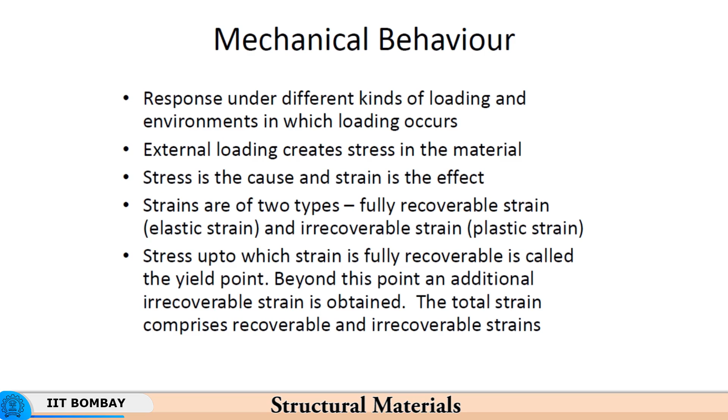So you have what is called rotating bending type of fatigue loading coming into play, because if you look at the shaft, it is being bent as well as rotated. So you have a shaft which is rotated at a certain RPM and it also deflects under load, and this deflection results in tensile compressive variation in the strain. Why?

Let us see. Now, let us say this is only bending, right. So at the outer fiber at the top you have a loading resulting in tension, at the lower fiber you have compression. Now imagine this being rotated at a higher speed.

So, at some point this lower fiber will go to the top and the top fiber will come to the bottom, and since the direction of application of force remains the same, what was under compression earlier now is under tension, and what was under tension comes under compression. This happens with the frequency at which the shaft is rotating. So, if the rotation of a shaft is at 5000 RPM, then this change will happen 5000 times.

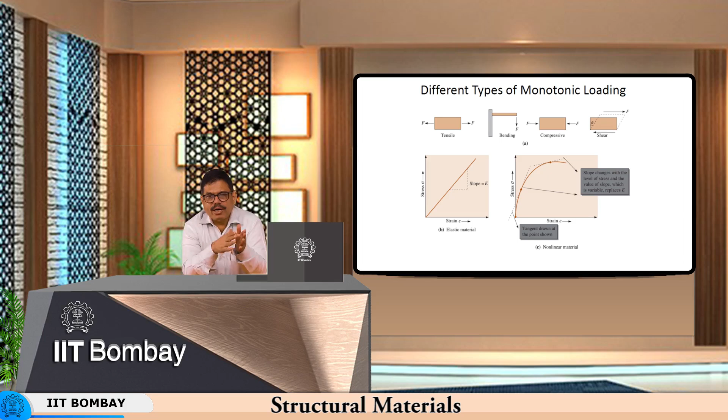You will experience these tension to compression changes taking place 5000 times in a single minute. The frequency at which the loading changes direction is typical of certain kinds of equipment, certain kinds of shafts especially. So, from the boiler where you had a load for a long duration, now you have a shaft which has got loading alternating between tension and compression. This is called rotating bending type of loading.

Similarly, there are different kinds of equipment which would be subjected to loads, let us say shear load or compressive load. There are machine elements which would be subjected to this shear compressive type of loads, and we expect deformation to be purely elastic in nature.

So, when the material is in service, you want the deformation to be purely elastic, and therefore the elastic stress strain ratio becomes important. The higher is the value of the slope, that is E, Young's modulus, the lower is the deflection or lower is the strain. That is because even if the stress rises to a very high value, a high slope in E ensures that the strain is very small.

This becomes important because if you have equipment of, let us say, infinite stiffness, meaning infinite Young's modulus, then it will not deflect at all, which means the machine elements will not change their shape at all. Now, although these strains are recoverable, so if the load is removed the strain is completely recoverable, the fact that the material is changing shape under load can itself create a problem over a period of time, and this is due to what is called fatigue.

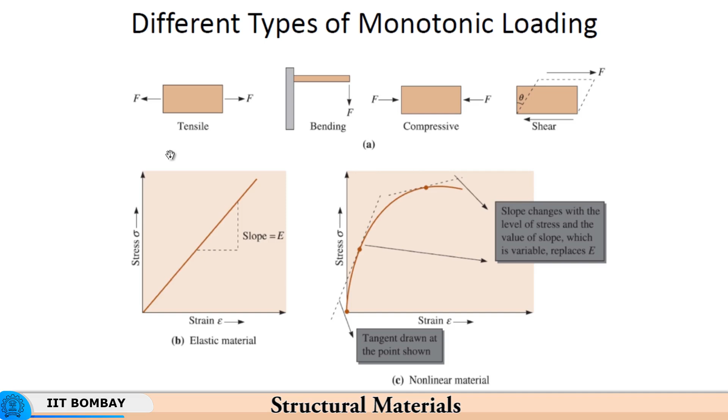Now we have a repertoire of materials, lots of materials which are possible, and we have seen that if we give a stimulus - that is, you increase the pressure or force to its working condition in service, sustain it for a certain period of time, and then take off the force that was applied - it will result in a stress which will rise to its in-service condition level, get sustained over a period of time, and then the stress will fall to 0 as the load is removed.

So load is the external stimulus and stress is the response of the material, internally generated to sustain that load - basically to achieve equilibrium between the externally applied load and the material. So the material reacts in the form of stress, which is in response to the load being applied, and this load is sustained for a period of time and then brought to 0.

Now the difference between stress and pressure, although the units are the same, is that pressure acts on exterior surfaces, while stress acts internally - it is generated internally. On the free surface, therefore, stress is 0. On the interior parts or interior surfaces, you can have stress generated in response to the load or pressure conditions acting on the surface.

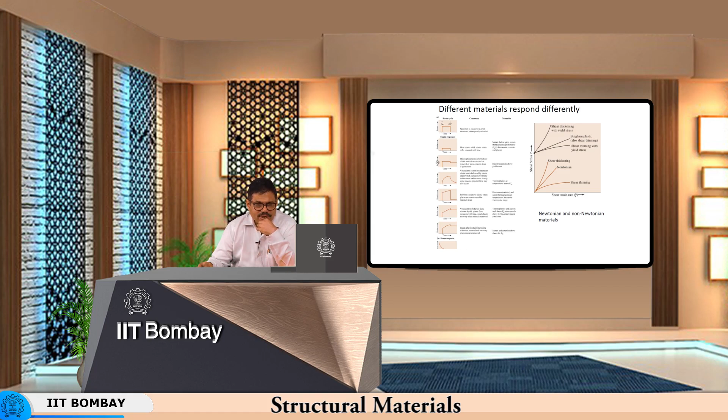Then there is an increase in the strain even under constant stress. So even if the stress remains constant, the strain continues to increase. This is the difference between this and that, and then you have immediate drop in the strain as your load is removed or the stress is removed, but then there is a retention of some amount of strain, which is the plastic strain, which is non-recoverable, or which is also called plastic strain.

So elastomers, rubbers, and some thermoplastics at temperatures above the viscoelastic range result in this kind of behavior. This way one can go on understanding the behavior of different materials. You also have another material like thermoplastics and glasses well above the glass transition, and metals above 0.5 Tm under special conditions.

Here you have what is called an immediate increase in the strain rate, and then you have hardening of the material due to the strain rate. So here you have hardening due to the strain rate increasing due to viscous effects.

Now here you are not talking about viscoelasticity. The difference between this and this is that here it is viscoelastic in nature, here it is viscoplastic in nature. So there is a significant amount of plastic strain that is retained over here. So you have thermoplastics and glasses above the Tg, and so they become a kind of viscoplastic.

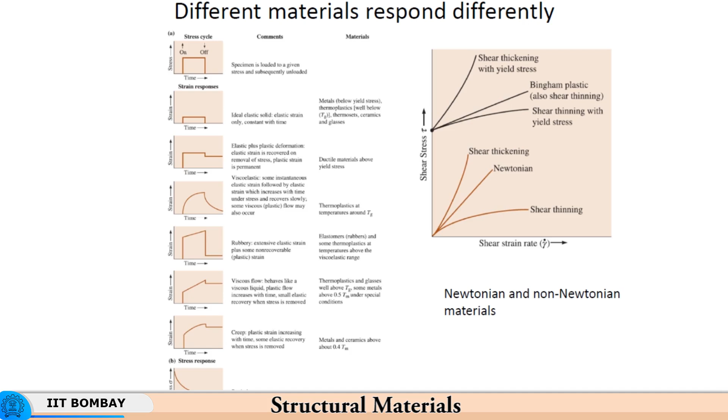So supposing you have loaded a sample - the stress level, as in thermoplastics, you load them up to a particular strain level and leave it at that - the stress level will continuously decrease due to relaxation of these polymer chains. So basically these are the different responses of the material, and that is exploited in actual use for different applications. That is what I wanted to emphasize by this.

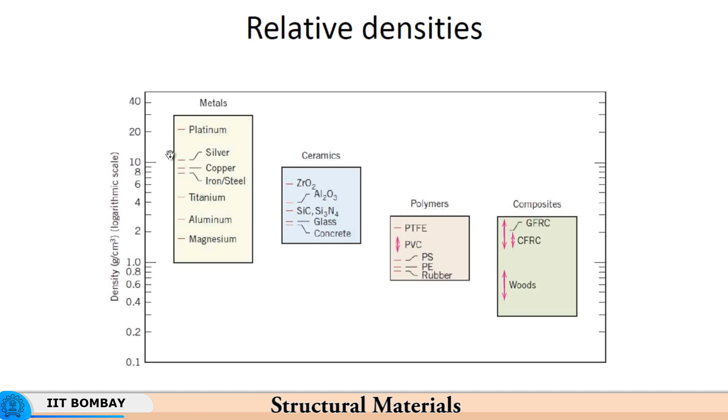The relative densities determine the weight. So we want to determine the strength to weight ratio, and so these composites, for example, have the least amount of density and therefore least amount of weight for a given volume. So if you can have very high strength with composites, then the strength to weight ratio would be of great advantage, typically in aerospace structures.

So we have discussed this already, and then I will come to the issue of the yield point, which we had discussed earlier. So I will just come to a worksheet where I will show you how it is determined again, so that you have no questions on that.

Under elastic conditions, the true stress and engineering stress are the same, because true strain is practically equal to the engineering strain. There is no change in the cross section, and therefore the true strain and engineering strain are practically the same. That variation can be in the 7th or 8th decimal place, which is not of interest to us.

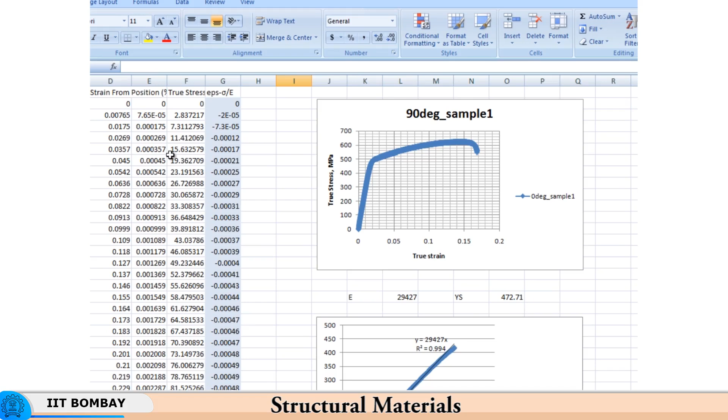Now this is the parameter which I have plotted for the stress strain curve. In the elastic range you have epsilon minus sigma by E, and this keeps on increasing. Here is the third decimal, and you see it has reached 0.00199, so 0.002 and less than 0.002, here slightly more than 0.002. So I interpolate between these two values, and then I have my yield strength as 472.71.

From this point onward I start applying my plastic deformation formulae. So I plot ln sigma versus ln epsilon, because I want to fit the plastic deformation curve into a constitutive equation sigma equal to k epsilon to the power n. This is the kind of Hollomon equation. k is the strength coefficient, n is the strain hardening exponent. So k epsilon to the power n is my formula in which I try to fit it, giving ln sigma equal to ln k plus n ln epsilon, that is the equation I get.

I then use this to calculate the value of n and k. I have r square always beyond 0.99, say 0.995 or 0.998, which is good, and I get the value of n as 0.128 and k as 805.127.

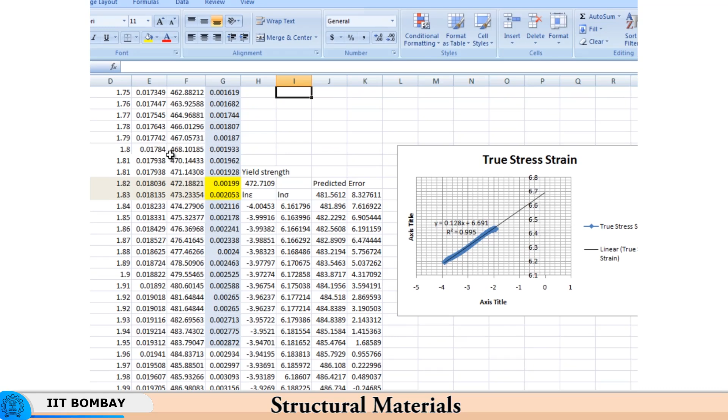If you look at the stress, it is about 473 MPa, and the maximum error is about 8 MPa. So 8 in 473 is a very small error which is tolerable, but if you want to really use the equation sigma equal to k epsilon to the power n, it is appropriate to go beyond about 8% of true strain. So if the strain is beyond 8%, the error continues to decrease to a very small level, and if you go down further it will be a fraction of a percent.

You have about 3 MPa error in over 500 MPa, 526 MPa of stress, so it is hardly any error that is incurred. That is why this equation becomes accurate not at very low plastic strains, but at relatively higher plastic strains, meaning here the plastic strain is comparable with the elastic strain in magnitude. 0.2% was the elastic strain.

We have assumed up to 0.2% proof stress for the plastic strain. Here you see it is a very small plastic strain, and the plastic strains are comparable with the elastic strains we had taken, like 0.002, 0.003. So the plastic strain is comparable with the elastic strain. We had put our yield point at 0.002, this is 0.003.

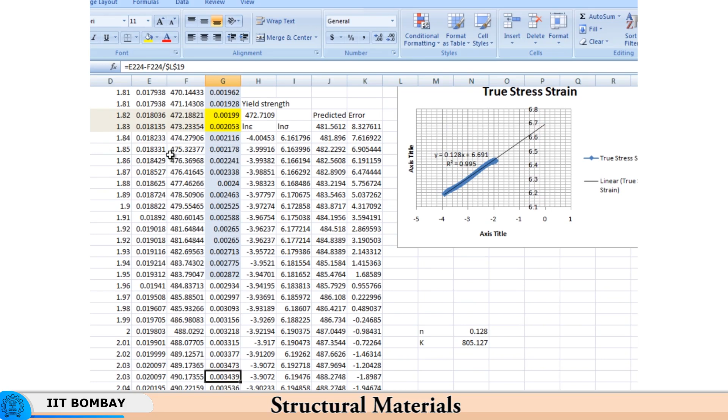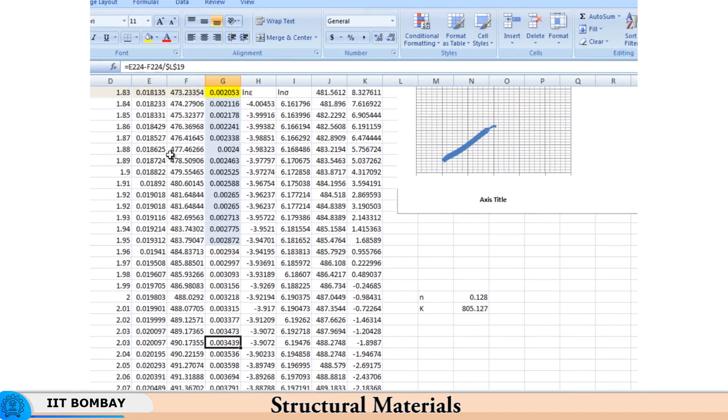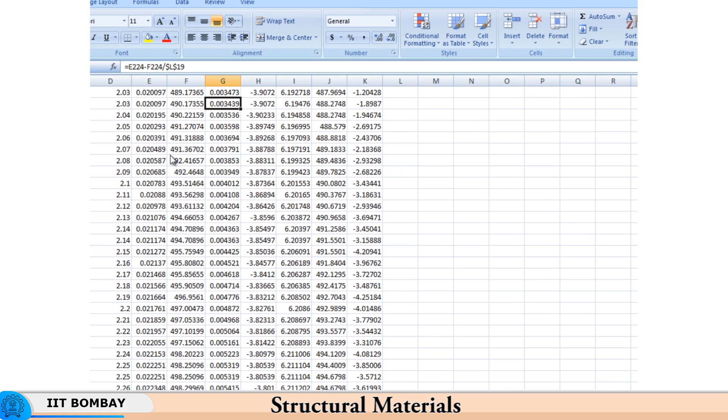So this region is kind of elastoplastic in nature, whereas as you go down you can apply the equation sigma equal to k epsilon to the power n with reasonable degree of accuracy. So this is what I wanted to explain about the yield point, and now we come back to our discussion about the mechanical properties.

You have the yield points of different materials given here, and if you load and unload, you see what is shown here. If you load and unload, you again have to get the 0.2% proof stress. This is the elastic recovery. So if you take a sample, load it to a certain strain, unload it, and then reload it, it will again follow this curve, and it will yield here and continue further. If you join this, it will follow the same curve, except for this cusp which results from loading and unloading.

This is the ideal situation. In reality, you have unloading from some strain, and then reloading taking place, so there can be slight variation, especially if you have unloaded it to a region of compressive strain, then the yield point comes down. So if you have unloaded the material to a strain below 0, meaning in the other direction, the material will yield at a lower yield point compared to what it did during tension. Then when you load it again, it will yield below the yield point at which it yielded under compression. So the material will undergo softening as you change the direction of stress.

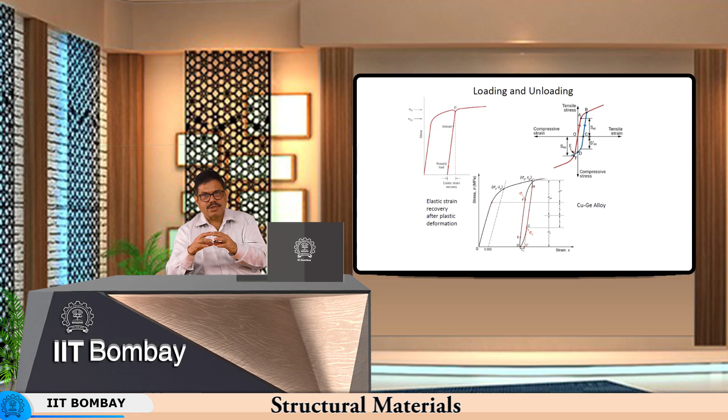Why? Because now the surface will get progressively softer, because the direction of stress is changing and the yield point has been exceeded. Initially the yield point was exceeded in tension, so in compression it yielded at a much lower yield point. Again, when subjected to tension, the yield point was further below. This way the shaft becomes softer and softer at the surface, and cracks develop at the surface and start moving inwards. This is how damage gets accumulated, particularly when the stress goes beyond the yield strength of the material, so the accumulation of damage is very severe when you cross the yield point.

Now, in some alloys like copper germanium alloy, what happens is when you unload a material, you see that the recovery, the strain recovery, is much higher than what would have happened if the stresses were purely elastic. So it is not just the elastic strains which have been recovered, but there is some additional recovery, and so you have this closed loop. The area of this loop signifies the energy dissipated inside the material.

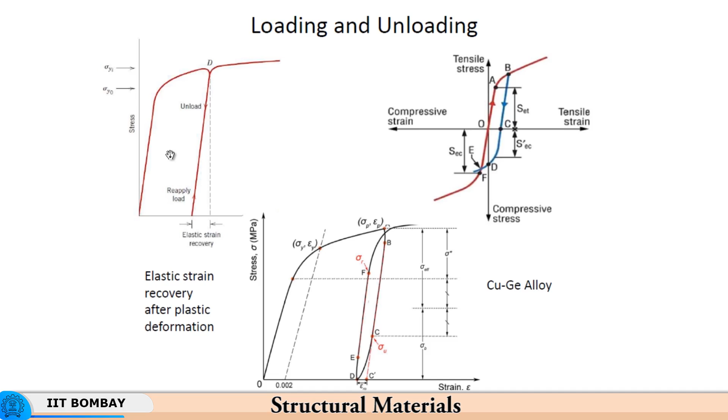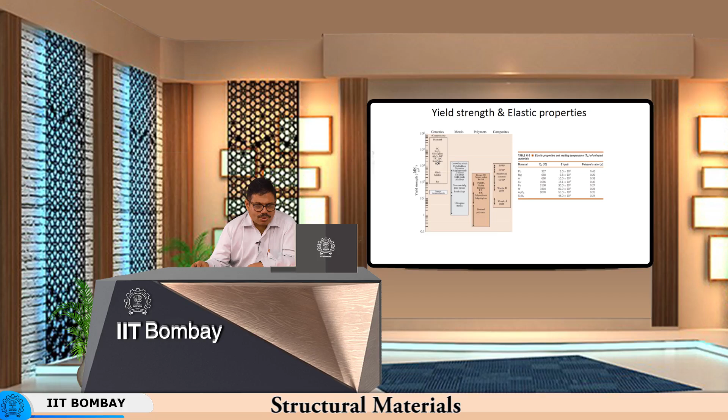You have polymers which have got completely different behavior with respect to loading compared to metals. You have metals in a wide range of yield strengths depending on how much you can alloy them, and therefore you can tailor the metals to different strength ranges, starting with 0, 10 to the power 0, up to 10 to the power 3, or something more than 10 to the power 3 MPa in yield strength.

So here you see that temperature affects the elastic properties. You have tungsten, which has got a very high modulus of elasticity, and it is retained at high temperatures, and that is the reason it is used for high temperature applications. It is called a refractory alloy, whereas steel and aluminum are not so good in resisting temperature when it comes to Young's modulus. Aluminum has got a low Young's modulus which diminishes very rapidly with temperature. So this is a good material for hot working or high temperature deformation, whereas tungsten is a good material for high temperature structural applications.

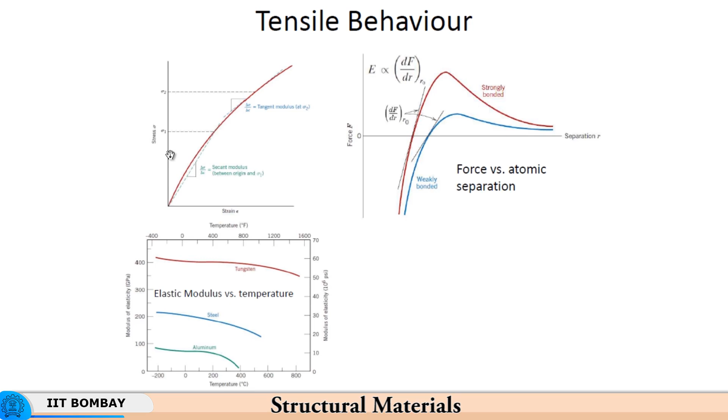Now we solve a small problem: calculate the elastic elongation. You have delta L by L naught, corresponding to the strain, on a 305 mm copper piece which is pulled within the elastic regime under a stress of 276 MPa. So your Young's modulus is given, and sigma divided by Young's modulus is the elastic strain. So delta L by L naught is the value of elastic strain, and delta L is obtained by multiplying this by L naught, which is 305 millimeters, and therefore the elastic elongation is 0.77 millimeters.

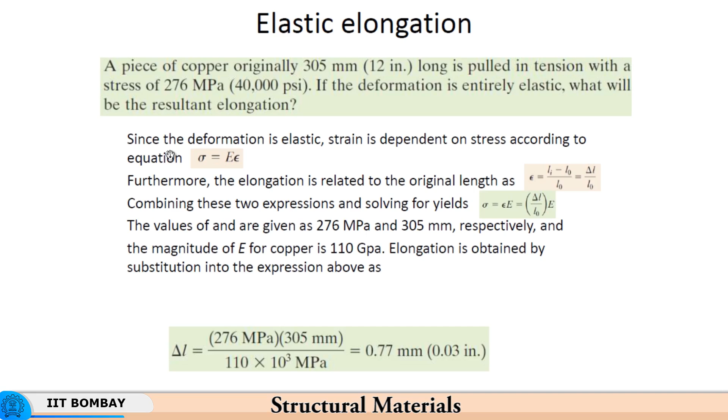So we have seen the energy absorbed by the material during the course of forming. We say that you have elastic and plastic regimes of deformation. If your deformation is in the elastic regime, let us say up to the yield strength itself, then you would have so much energy stored under elastic deformation. So UR, the energy stored in the material in elastic condition, is equal to the integral of sigma d epsilon. Mind you, this is the recoverable elastic energy, because once you remove the load, the stress becomes 0, the strain becomes 0, and therefore the entire energy is recovered.

So under load you have a certain amount of strain energy in the material, under no load the energy is exactly 0. That is why this is a nice right angle triangle, and therefore the integral of sigma d epsilon is essentially 1/2 of sigma y into epsilon y, the area of this triangle, which gives you the energy stored under elastic conditions, sigma y square upon 2E. So if the Young's modulus is practically 0, then you have a very large amount of elastic energy stored in the material, given a constant sigma y.

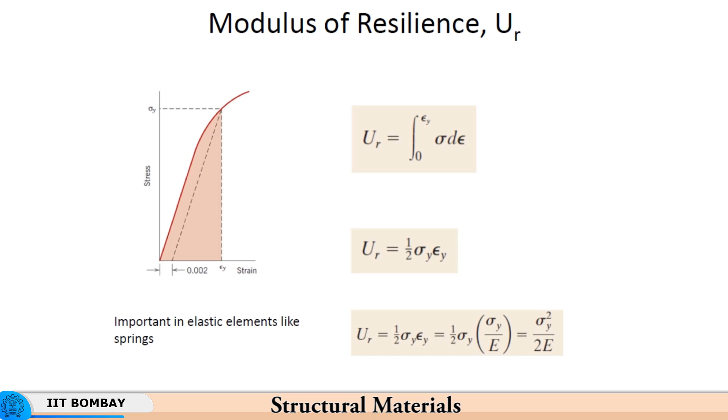Similarly, when you go to a clothing shop, the clothes are hung with the help of clips. These clips are essentially elastic in nature, in the sense that you press them, they open up, and when you release them they exert a certain amount of pressure on the cloth so that it does not fall down. So there a certain amount of elastic energy has to be stored, and normally spring steels, so-called spring steels, are made with the addition of some silicon which promotes this kind of springiness in the material. Silicon steels are well known for spring type of applications.

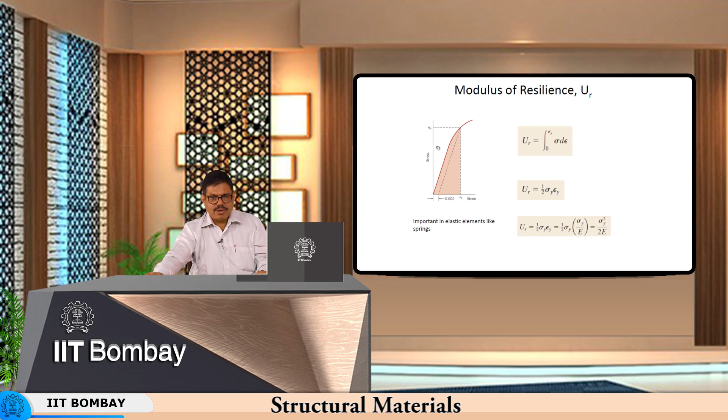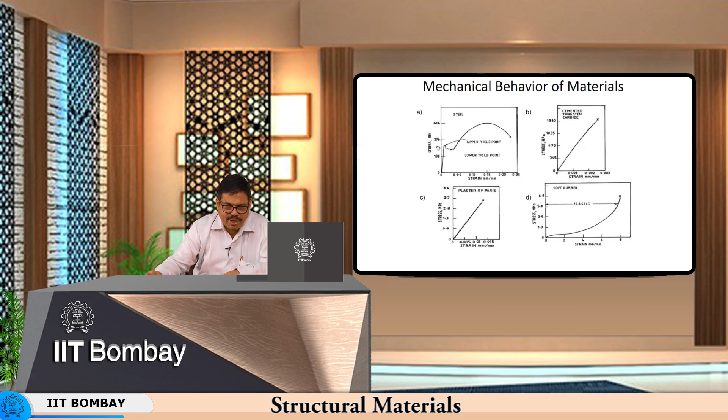So you see here different mechanical behavior which we have already discussed. You have the typical curve of mild steel here, you have tungsten carbide, and plaster of Paris. These last two are brittle in nature, and then here you have elastic deformation of a large extent due to uncoiling of polymer chains. We have seen all these things before, and the indices of ductility are percentage elongation and reduction in area, because percentage elongation is not a real estimate of ductility, since the cross section and size effects influence this a lot.

If your sample is microns thick, for the same material you will get a much lesser percentage of elongation. For a thicker material you will get more percentage elongation. So this is influenced by size effect.

If you look at the value of n, the strain hardening exponent, that is a much better estimate of ductility and index of ductility, because that tells you the extent of uniform strain you are going to get in a plastic deformation regime.

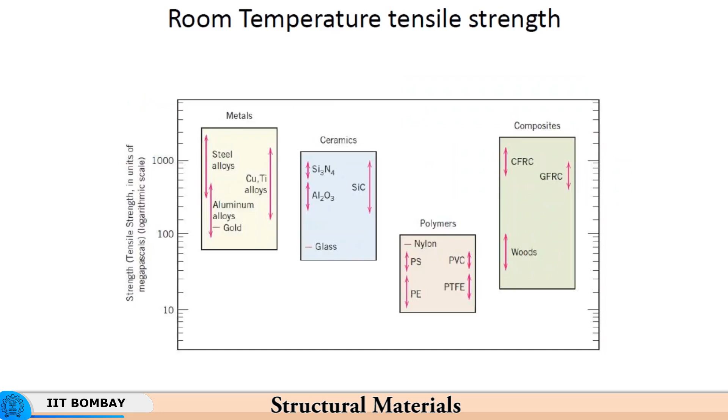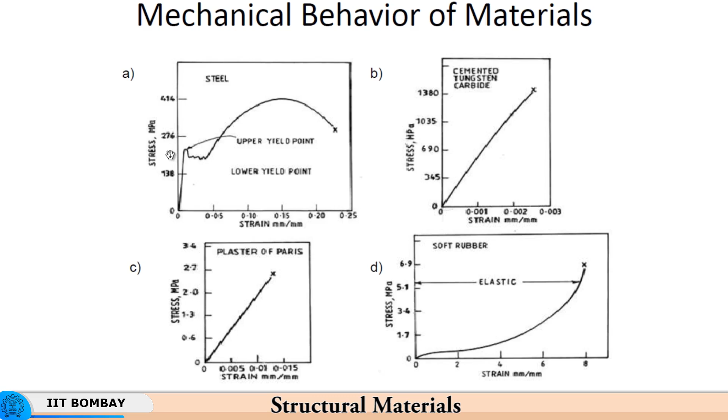Here, for example, you have a higher value of n, which will represent a high value of ductility. So a large value of n means that the material has got greater uniform elongation, and this point shifts to a higher elongation. That is what it means by having a higher value of n.

Now you have reduction in area. If the material is capable of a greater reduction in area, let us say gold for example gets reduced to a point, at time of failure the area of the sample at failure is practically 0. So the reduction in area also refers to the extent of ductility the material can undergo.

So now the reduction in area combines the effects of strain hardening and strain rate hardening. If you look at the overall reduction in area, remember that volume remains constant in plastic deformation.

There will be certain reduction in area during uniform deformation also. So let us say you have a sample of certain area and certain length. If the length becomes double, the area will become half naturally. This happens during the uniform deformation regime, assuming uniform deformation is still going on when the length doubles.

Immediately after that, let us say necking takes place, then the reduction in area takes place further. For a material like gold, if it were to fail at a point, the reduction in area would be the sum total of the reduction in area during uniform deformation plus reduction in area during plastic deformation, and you will get practically the entire area.

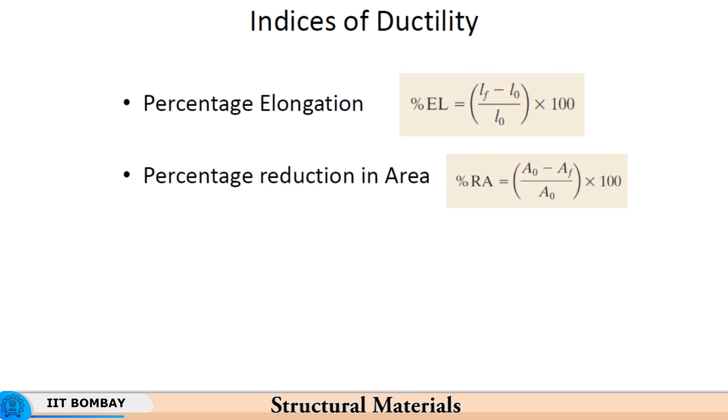With a high value of n, you will get a large reduction of area in uniform deformation. If the rate sensitivity, that is m, which refers to viscous effects, is more, then even after neck formation and localized deformation you will get a large amount of reduction in area. So the rate of reduction in area with strain becomes more gradual as the value of n, the strain hardening exponent, and the rate sensitivity index increase.

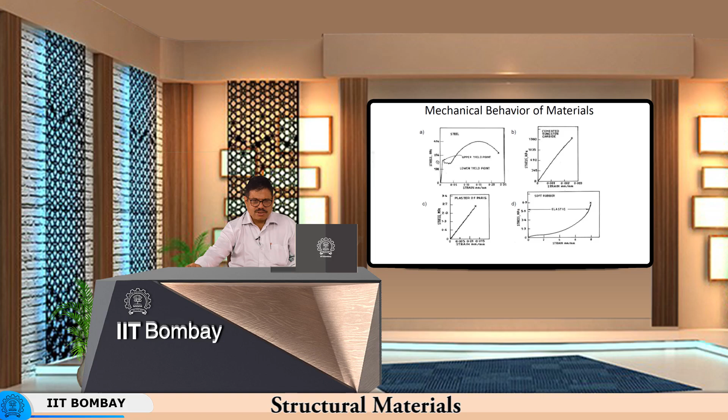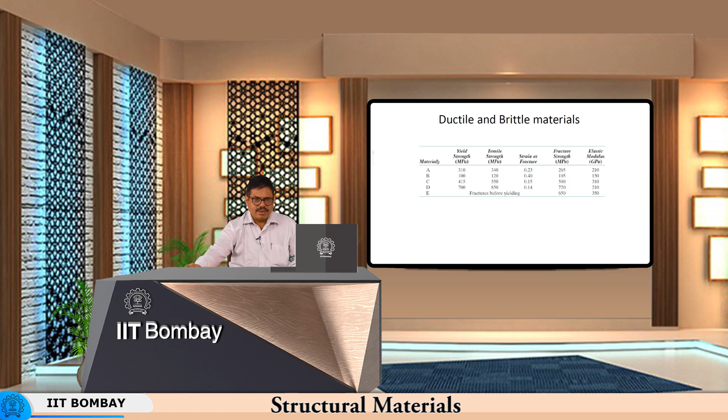So, this is high strength steel, whereas here the strength is low, although the Young's modulus is the same at 210 GPa. C is a material in between, it has got 310 GPa as the Young's modulus and an intermediate strength.

The ratio of tensile strength to yield strength is an indicator of the relative strain in uniform deformation. If the difference is very high, you will get a good strain under uniform deformation. If the ratio is very small, you are likely to get failure at relatively low strains.

B is a very ductile material, it has got the minimum yield strength and therefore a very high strain at failure, whereas the other two high strength materials C and D have got practically the same strain at fracture.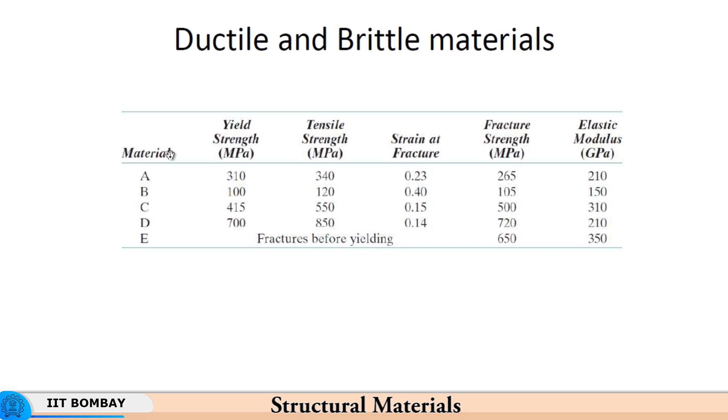So, we distinguish now between the energies. I told you about the energy stored in a material under elastic conditions, which is useful for making springs - this is called resilience. So, elastic energy stored in the material due to elastic deflection is the resilience, whereas toughness refers to the energy consumed per unit volume of plastic deformation.

So, you have integral of sigma d epsilon from 0 to epsilon. In case of elastic energy this will be up to the strain corresponding to the yield point, and so epsilon will be equal to sigma by E, that is Young's modulus, giving the corresponding equation. So, E into epsilon will be sigma, and so E epsilon d epsilon is for the elastic regime.

For the plastic regime you have sigma equal to k epsilon to the power n, and so you get k epsilon to the power n plus 1 upon n plus 1 as the energy stored in the material due to plastic deformation. So, sigma epsilon upon n plus 1 is the energy stored due to plastic deformation.

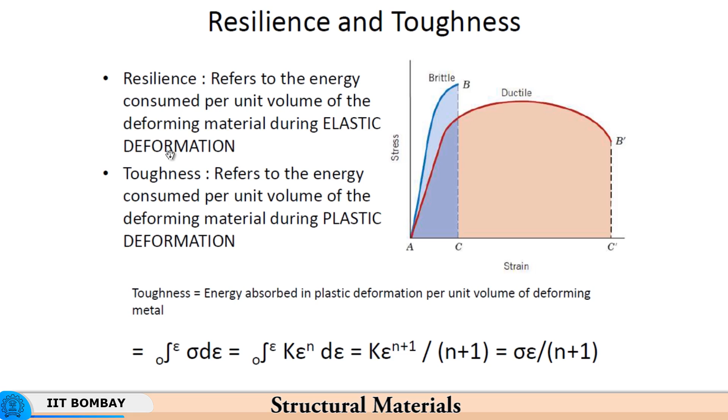Similar is the case for plastic deformation, for forging for example. You want to forge a railway axle or a wheel of a railway train. You know how much energy is needed for deforming one unit volume of material, and you know the volume of material needed for forging the axle or wheel. Then you know the total energy required for the actual forging.

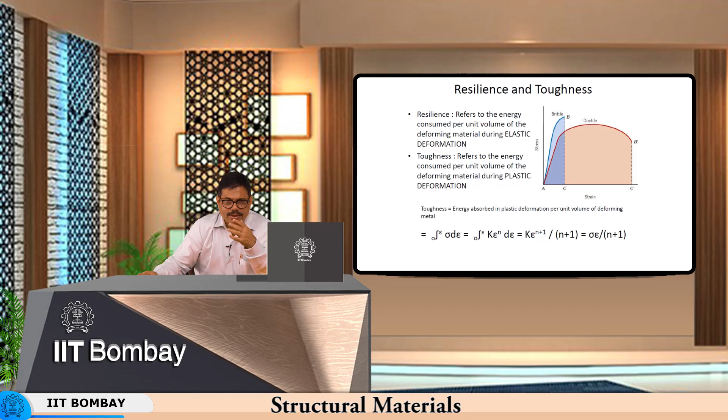So basically, what we are looking at is estimation of the energy that the equipment should deliver to meet the requirements of plastic deformation of a product like a railway axle or something like that.

So, for a few materials I have listed out the Hollomon constants N and K. So, N is this and K is here.

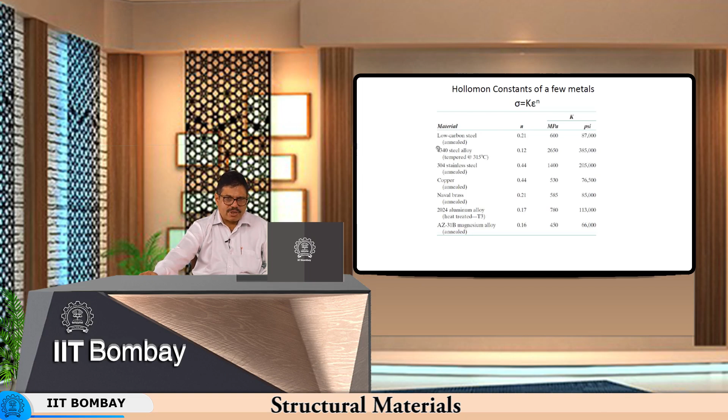So, it all depends upon how the materials behave under room temperature conditions. So, these are all room temperature properties of this alloy.

So, now we come to the hardness of the material. Another property of the material is hardness, that is resistance to plastic deformation, related with permanent deformation. You deform the surface with a Brinell test, pressing the ball into the surface and examining the size of the impression. Load divided by the area gives you the value of stress under a certain amount of force. Force is fixed and the area of indentation is measured. Smaller the area of indentation, harder is the material. This is the Brinell type of test.

Vickers and Brinell follow this same principle, load divided by the area of indentation, whereas Rockwell follows the principle of measuring the depth. You have a ball indenter, which could be steel or anything else, or a diamond indenter depending on the hardness of the material. For example, a ball is used for relatively lower loads, and a diamond is used for relatively harder materials and higher loads. The depth of indentation gives you the hardness in case of Rockwell test.

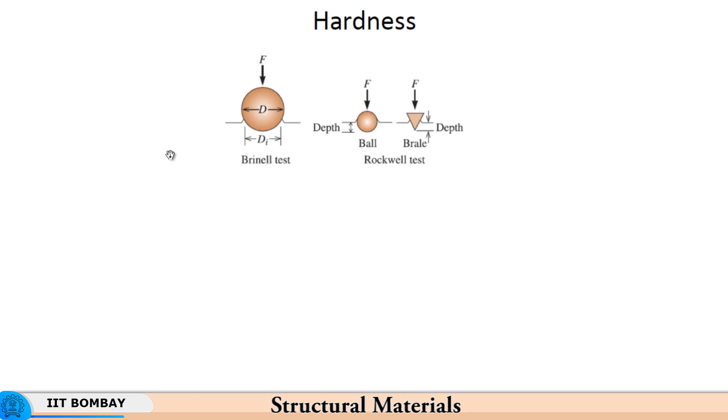Rockwell test does not give you the stress, whereas Brinell test gives you a stress. So you can correlate the stress determined by the Brinell test and the yield strength of the material, if there is no surface hardening treatment being given. If the surface hardness of the material is representative of the bulk properties, then you can measure the hardness at the surface and correlate it with the yield strength of the material. You can't take that as the yield strength directly, but you can correlate it.

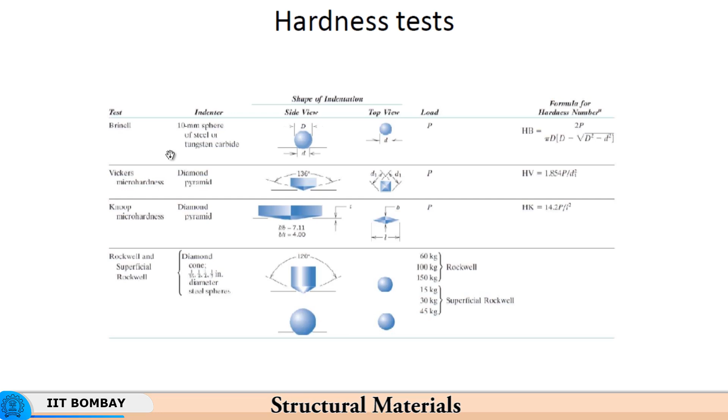Let us see that in a minute. These expressions give you the different kinds of loads under different testing conditions and the formula for the hardness. You have a formula for BHN, which is essentially the load divided by the area. Same is the case with the Vickers hardness and also the Knoop hardness, which has a different kind of pyramid.

You have Rockwell hardness scales to designate the hardness of the material. Instead of talking in terms of millimeters, you have A scale, B scale, C scale and so on, and then you have superficial Rockwell hardness scale as well, with much lower loads.

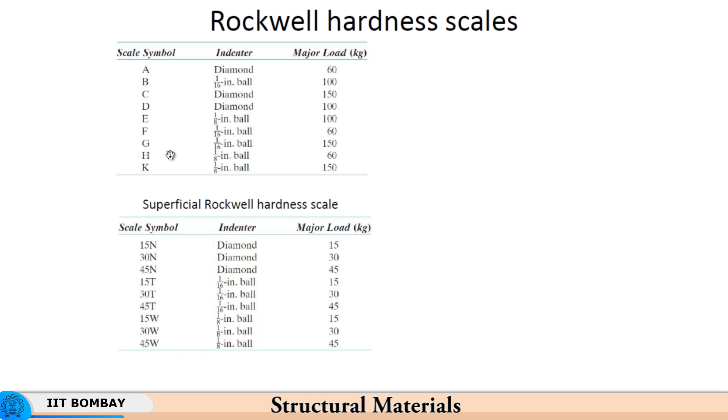Sometimes you want to measure a micro hardness test, for example to find out the hardness of the case carburized layer. You do not want to go too deep into it, otherwise the indenter will just penetrate through the case and measure the hardness of the parent metal instead. So you want a superficial hardness, for which the Rockwell scale is given for relatively lower loads. You do not apply the loads used for a normal Rockwell test; lower loads are used for superficial hardness.

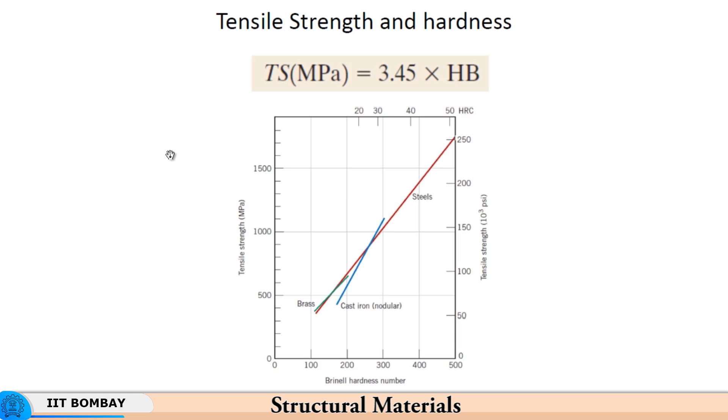Now the tensile strength and hardness are related. The Rockwell scale will not relate directly with this, but BHN, VPN etc. do relate with it. Tensile strength in MPa increases with the Brinell hardness number, and you get different values of hardness for different kinds of materials.

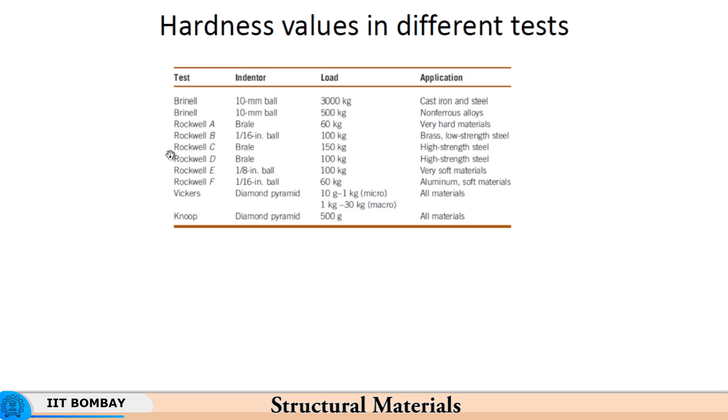Some illustrative values have been given here. For example, a 10 mm ball with 3000 kilograms is used for cast iron and steel, for Brinell testing. Non-ferrous alloys use 500 kilos, since the materials are very soft. For Rockwell A, B, C, D, E, F, different kinds of indenters and loading conditions are used, and they correlate with the properties of the material, whether it is hard or soft. High strength steel would require a Brale indenter with higher loading, but very soft materials would require a small steel ball loaded to relatively small loads.

Then we have impact behavior, where impact takes place under various conditions, and this relates with crack propagation. We will discuss this impact behavior separately in the next lecture, because it is very important and tells you at what rate a crack or any defect in the material is likely to propagate. We will discuss this in the next class. For now, thank you very much.